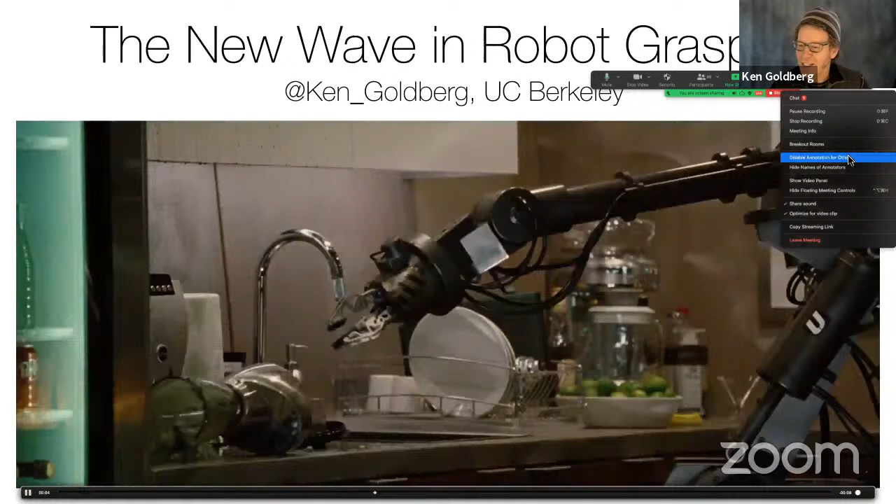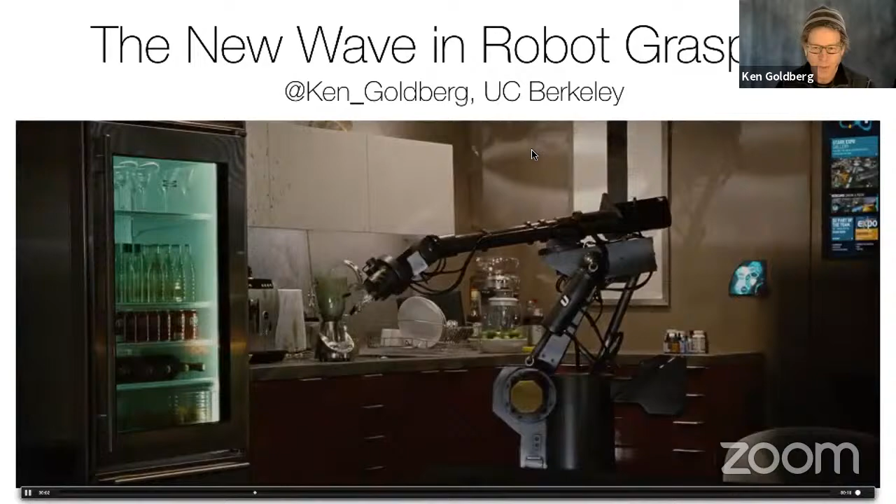Ken, all yours. Thank you so much, Animesh. I really appreciate that. It's such a pleasure. I'm glad that you pointed out my major achievement, which is being your advisor, a major accomplishment, I should say. Let's see. Can you see the screen? Is the video moving? Uh-oh. Now I'm worried that something went wrong. No, I think everything. You can see it? Yes, everything works. Okay, great. It's great. All right. Thank you, guys. Thank you for being here.

So what I want to cover today is what I call the new wave in robot grasping. And I always like to start with this video clip from Iron Man, and Animesh and other students have said over the years that this was a big inspiration for them to get them interested in robotics. And I love this scene in particular because that's kind of exactly where we are right now. Robots are still incredibly clumsy.

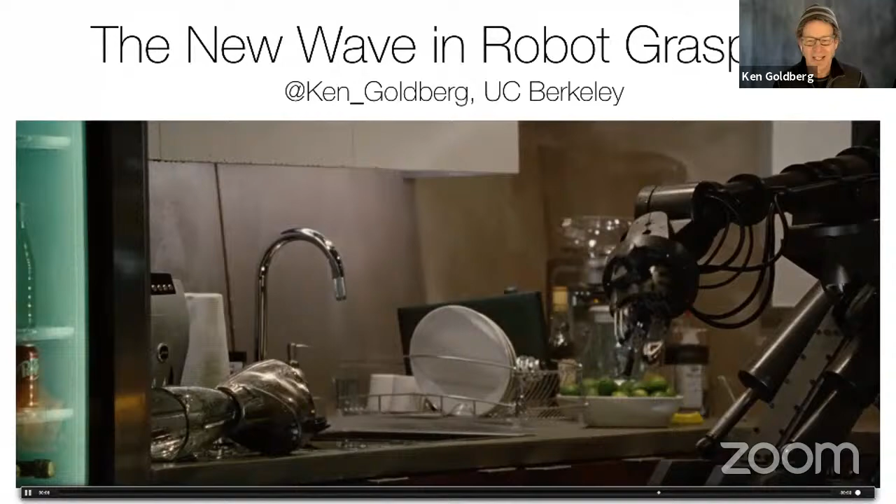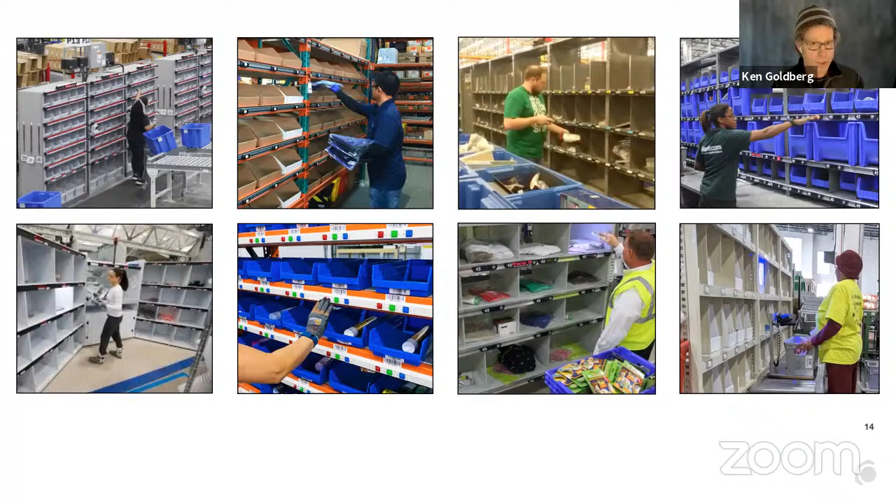Now, here's the challenge: what's behind the scenes when you order things, as most of you know, is that the orders have to be put together from these warehouses, and this is essentially a manual job. And this is what it looks like in an Amazon warehouse. And the other issue that you're seeing here is the proximity. This year, because of COVID-19, people didn't want to work in these kind of environments. They were too close, so they had to space the human workers out. And so there was a real limited supply of workers and a massive increase in demand.

So the grand challenge, as Rod Brooks has put it very nicely, is that if robots could grasp arbitrary objects, anything you put in front of them, like you see here, this is what you see in a warehouse, if we could do this, it would have significant impact in factories, homes, and warehouses.

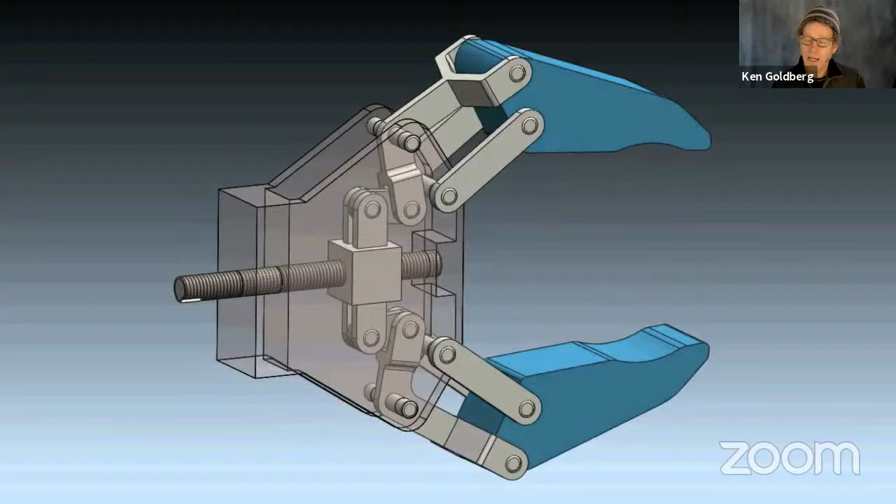Now, let me address the issue of hardware for a moment. And I know that there's really interesting and exciting work going on in robot grasping with hand design, but I want to argue in favor of very simple hands. This is the classic parallel jaw gripper. It's the workhorse of robot end effectors, and it can actually do almost anything.

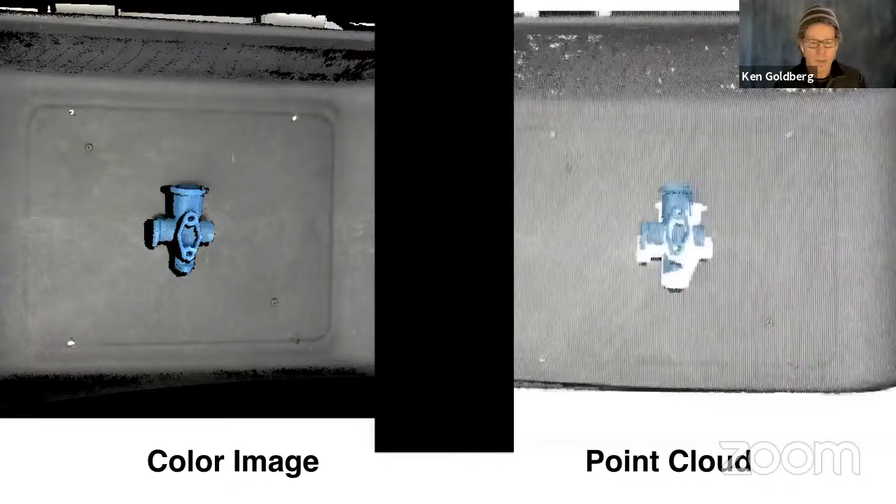Now, another thing I want to talk about is sensing. So a big change in the last decade is in depth sensing. And as you know, LiDAR has had an enormous effect on work in self-driving vehicles. It's also being used in this problem of warehouse grasping. And I just want to point out that it is an important advance, but it's not a silver bullet.

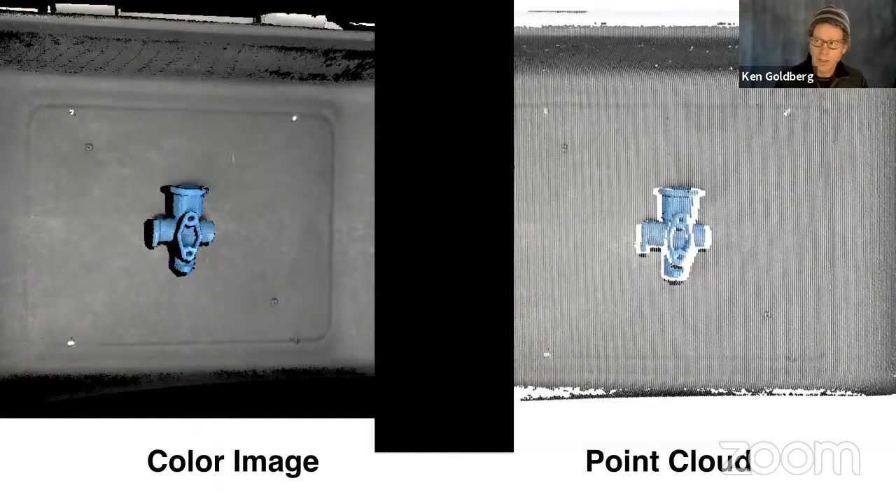So if you look at the image on the right, I just want to show you that the point clouds you get out of a typical depth sensor are not perfect. There are gaps and holes, and this is due to the light not reflecting in the way that it might be expected. And this is exaggerated when there are areas of high curvature or transparencies or specularities in metallic objects. So that's a big problem and something we have to overcome.

And I would even say it's non-stationary, because as you're pushing the object, it encounters different aspects of the surface friction. This is a very, very minute change. Just a grain of sand under there will cause a dramatic difference in the final orientation of the object. Now, I want to say that this is a hard problem. We can predict the motion of an asteroid 1 million miles away far better than we can predict the motion of pushing an object across the table.

In fact, I would even go so far as to say this is an irreducible problem. Knowing how the object is going to react is not something that with better information we can resolve. It's aleatory uncertainty. It is irreducible. Okay, so with all that, this is the challenge. We want robots to come in and clean up after a dinner party, but let me give you a sense of what it's like to be a robot.

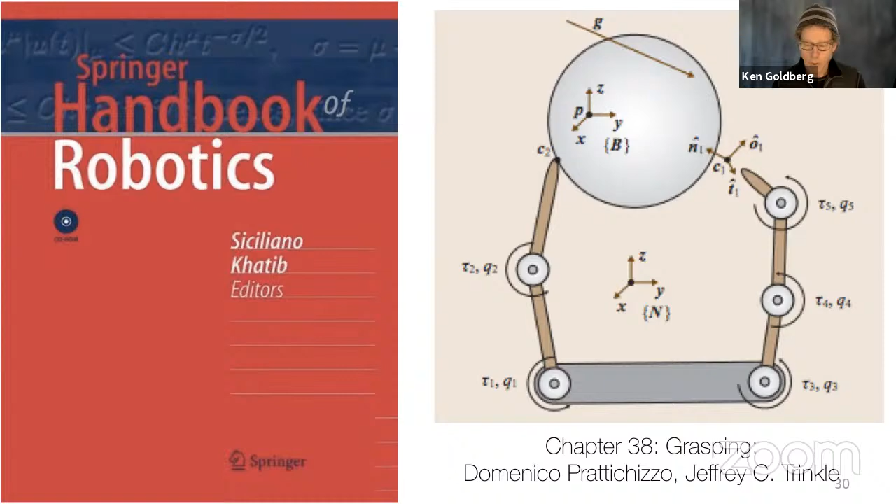Now, if you go into the Handbook of Robotics, the recent edition, there's a chapter on robot grasping. It's a great chapter. It covers this very, very nicely. It's about 40 pages. And if you get to the very end of it, you'll find a sentence: when a robot identifies an object to grasp, its knowledge of the object's pose and geometry are not perfect. Now, this is only mentioned at the very end of the 40-page chapter.

I consider this one of the greatest understatements of all time. I mean, this is such a huge matter, but it's totally not considered until the very end. And this is this uncertainty that I'm talking about. And the first wave essentially ignores it. It says, we know everything. We know the exact precise shape of the object. We know where all the contacts are. And that's what allows us to develop this beautiful mathematical machinery that can determine where things are. Okay, but that doesn't quite work.

Well, we started developing a model for this to capture uncertainty, and this was the beginning of Jeff Mahler's PhD thesis. He's contemporary with Animesh, and Animesh was involved in some of this work as well. And we call it the dexterity network, for a reason I'll explain, or DexNet. And the idea here is that there is uncertainty. So we're going to treat it in a statistical way. We're going to consider all these variables as random variables. And now we have a graphical model where we can talk about where the sources of uncertainty are.

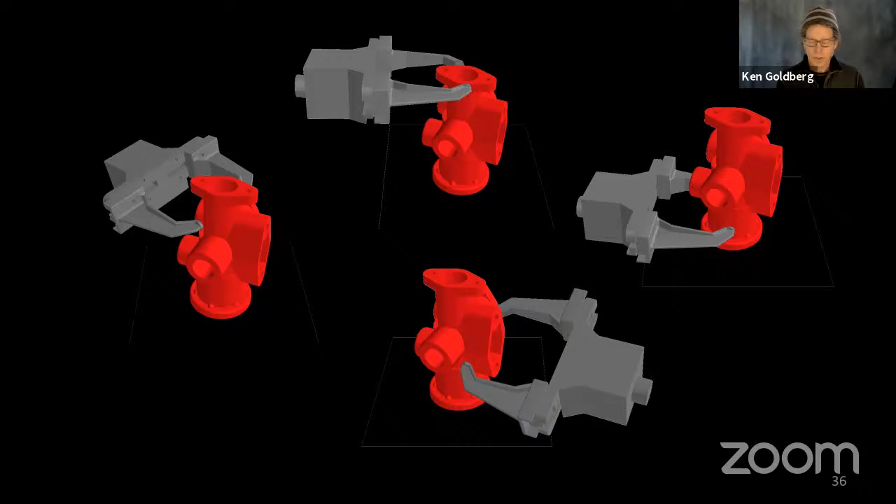So what I want to do, though, is I want to find ones that are robust. In other words, they are tolerant of these uncertainties. And what I mean by that is shown here. I have a nominal grasp, and then what I'm doing is I want to start to look at small perturbations on that grasp and sample from these distributions.

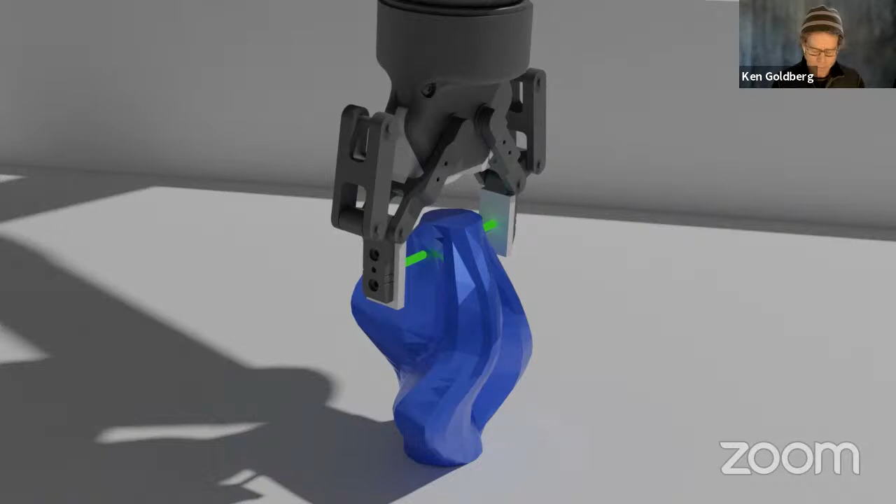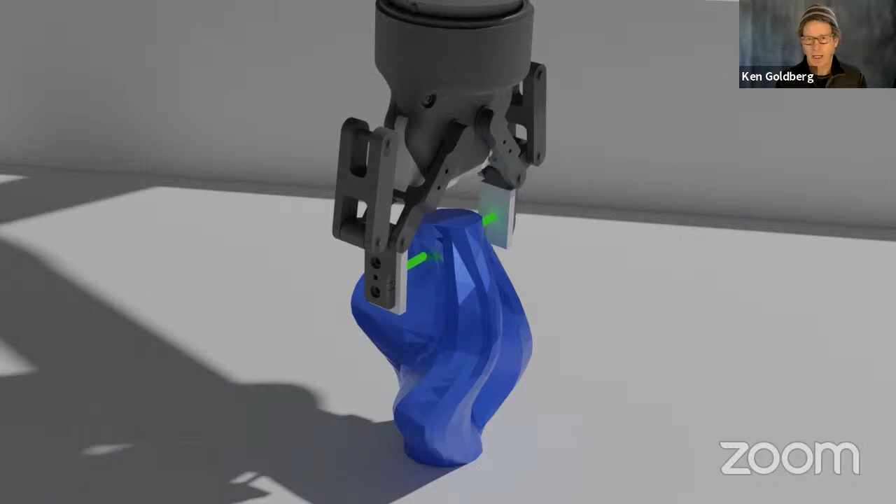So I'm varying the pose of the object, the pose of the gripper, the center of mass, and all of these variables. And for each one, I'm checking, will it succeed, using the classic wrench mechanics. So I'm not throwing that away. I'm using it, but using it in a stochastic model. And so then we can do a number of samples, and then we basically are doing a version of Monte Carlo integration here to estimate the probability of success for a particular nominal grasp.

So the outcome might be something like this, where on the left, we have a very low probability of success, and on the right, very high probability of success. And hopefully that's intuitive to you as well, because with the one on the left, you can imagine a very small error will cause that part to move away, whereas the one on the right is almost self-aligning. It tends to sort of close in and scoop up the part, even if there's small uncertainty. So that's why it has a high probability of success.

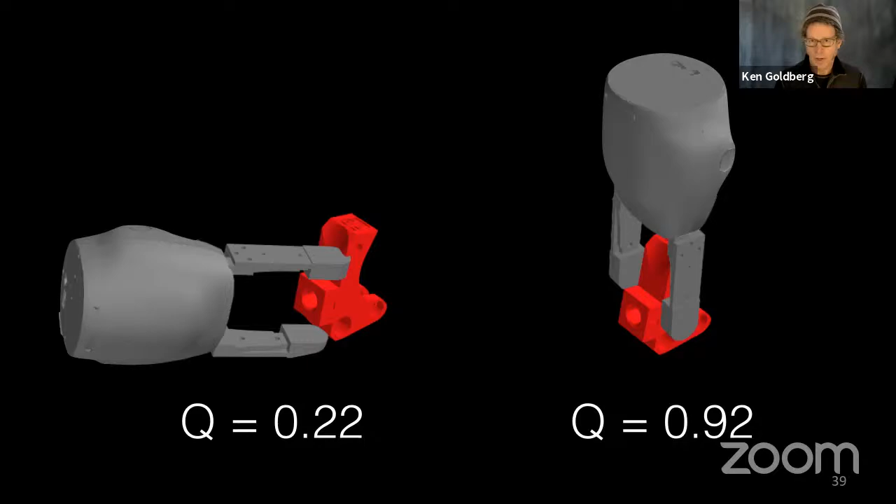Now, we implemented this in what we called DexNet 1.0, and the idea was we took images using depth cameras that I mentioned earlier, and we then estimated the state of the pose of the object, that's X, and then we apply the Monte Carlo analysis to basically find the grasp that has the highest probability of success. And let me show you it working.

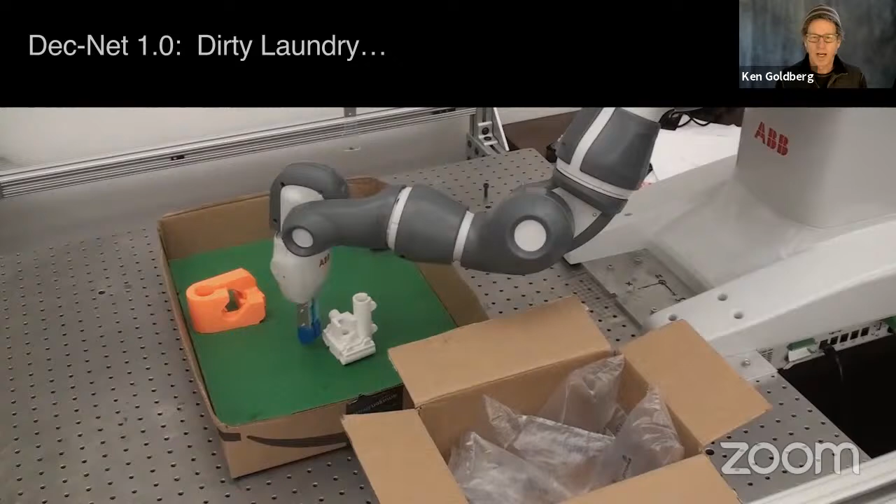So not so much. All right, what happened? Well, the problem here is that it computed a beautiful, robust grasp, but the state was wrong. So it thinks the object was actually in a different configuration, and it executes a perfectly robust grasp, but for the wrong state. So this does not always work. And the issue is perception uncertainty.

And so now we have another issue here we really want to model. Remember, we started with the 3D camera image, and then we use that to estimate state. But we have to actually learn a better way to do that, and we have to do that more systematically. So now I'm given an observation, Y, which is in this case a point cloud or depth map, and then I want to plan the grasp that will maximize the robustness or the probability of success. And this really leads us to the second wave, where uncertainty in perception comes in.

And this is where this distinction between Plato and Aristotle comes back, because remember, Aristotle was arguing in favor of a very different approach to making progress in the world, and it was to look down at all the plants and animals and rocks and minerals and build up models from data. So his point was collect data, and that is essentially the root of the contemporary wave in artificial intelligence, deep learning. It's data driven, and it's been extremely successful.

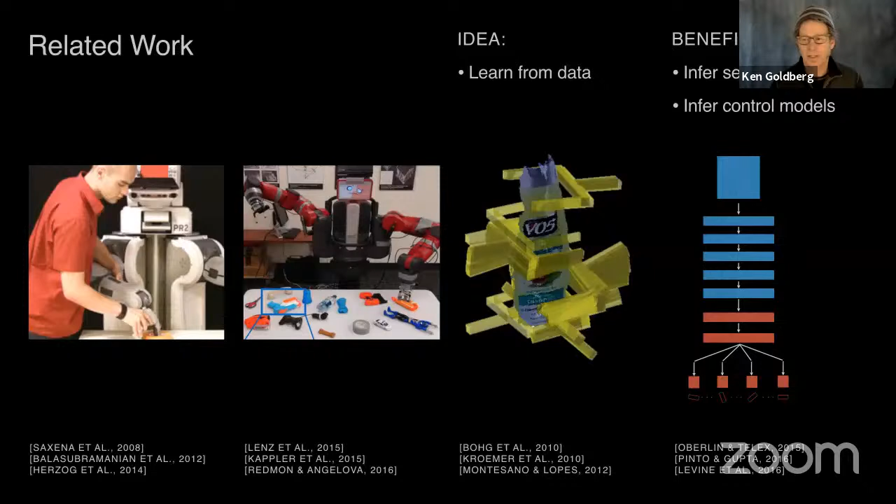And a number of researchers have been applying that to robot grasping, and it's accelerated over the last decade. One of the very natural sources is to look at real examples, to learn from experience in the real world. And so these can be either human labeled or self-supervised. In particular, you're probably familiar with the arm farm at Google that set up 14 robots to work around the clock to basically acquire data on grasping.

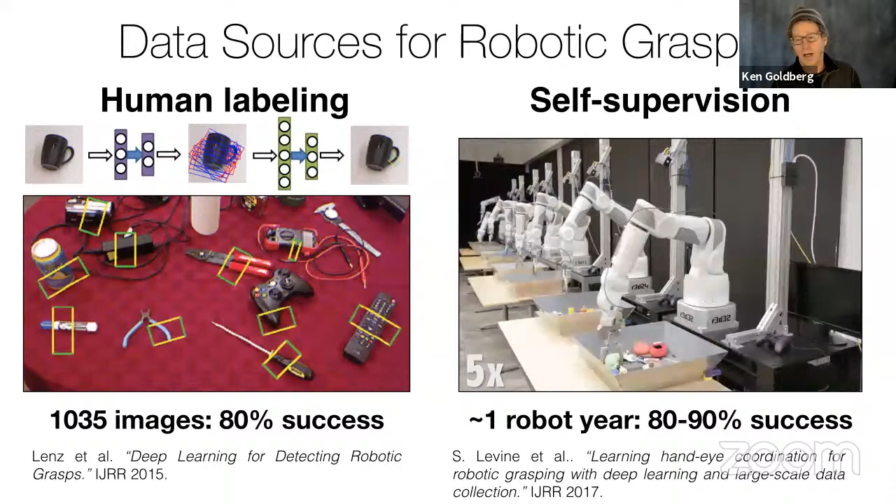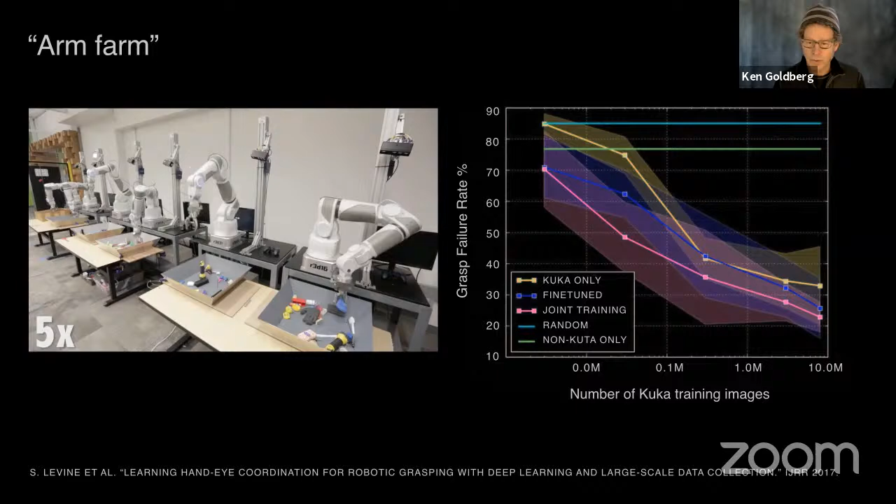And one thing I want to point out, though, is that if you look at the published results there, as it learns, this is a learning curve, it's able to reduce the failure rate, as is shown on the right. But if you look really closely, this is a log scale, and it says that after about 10 million examples, the system is at about 20% failure rate.

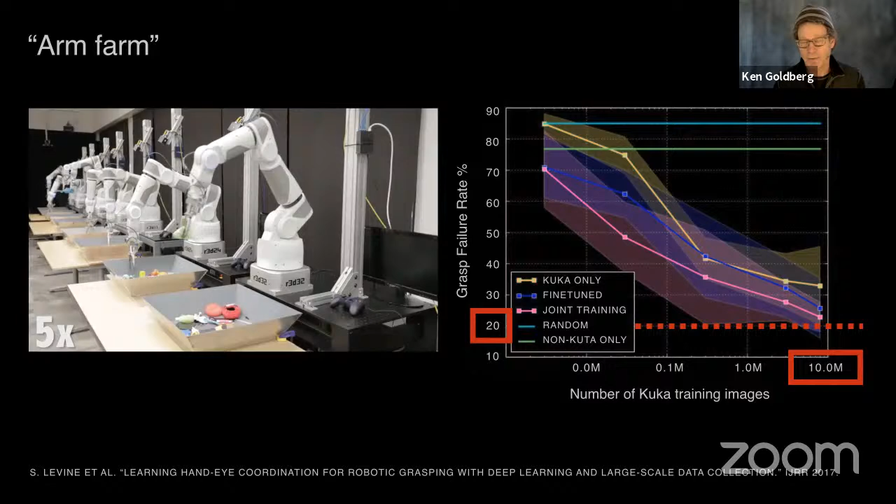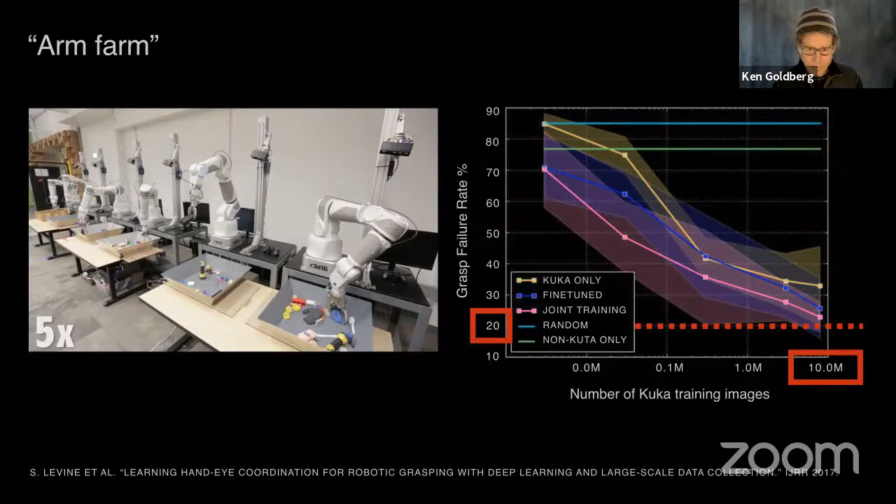Now, if you try and extrapolate out from that, it looks like, probably at 100, that's, by the way, a year's worth of round-the-clock data collection. So if you want to get down to 90%, looks like you're going to need another 10 years of data collection. And if you really want to drive it down to 95, you might be looking at 100 years. So my point is that this idea is that the system, by collecting data, you need a great amount of data.

Fei-Fei Li and her colleagues developed this ImageNet, this data set of millions and millions of images, but they were hand labeled, drawing bounding boxes around objects and then labeling what those objects were. So my hypothesis is, could we do something similar with robotics? Instead of ImageNet, we'll call it DexNet. And the idea is to come up with lots of labeled examples. And in this case, we're labeling them not with a name of an object like a necktie, but we're labeling the objects with robust grasps that we're pre-computing.

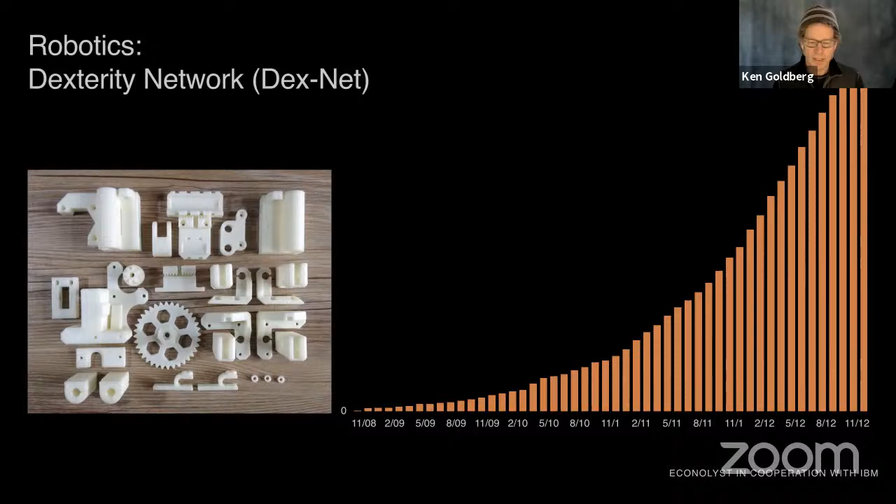And so this is the analogy: can we generate a very large data set that would get us to a critical mass where we could start to see the system generalizing to new objects? In the same way that ImageNet reached a critical mass, and once you had that, you could learn a very large neural model, a convolutional neural net, that would then be able to generalize to new examples. And so we set out to do this, and the good news is that there's a lot of 3D models out there.

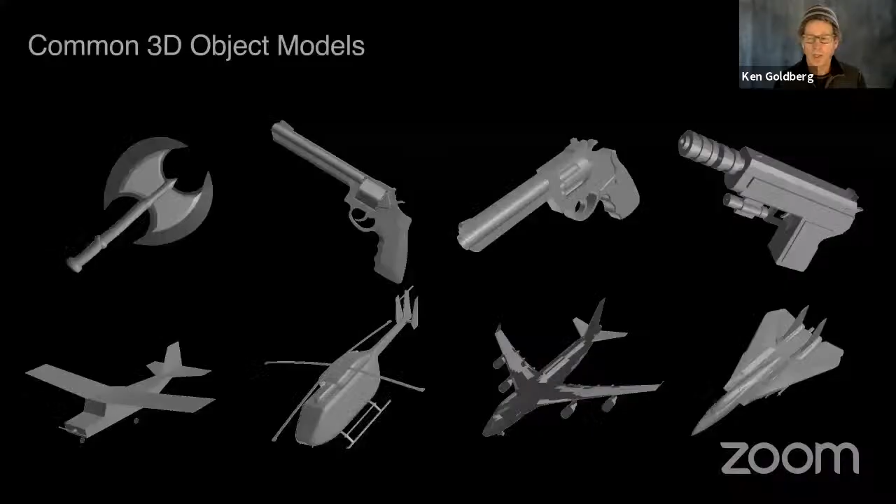One is that a lot of people are publishing 3D models for gaming. So when you look out there, you'll find lots and lots of weapons and aircraft. We have plenty of those, but those are not very commonly found in warehouses. So we had to really curate a data set of three-dimensional objects that were more natural in, let's say, warehouse and home environments. So we found objects like these. We cleaned them up. We made them watertight so that the surface normal properties are correct. We made them into regular solids, etc., and scaled them. This was a fairly long process.

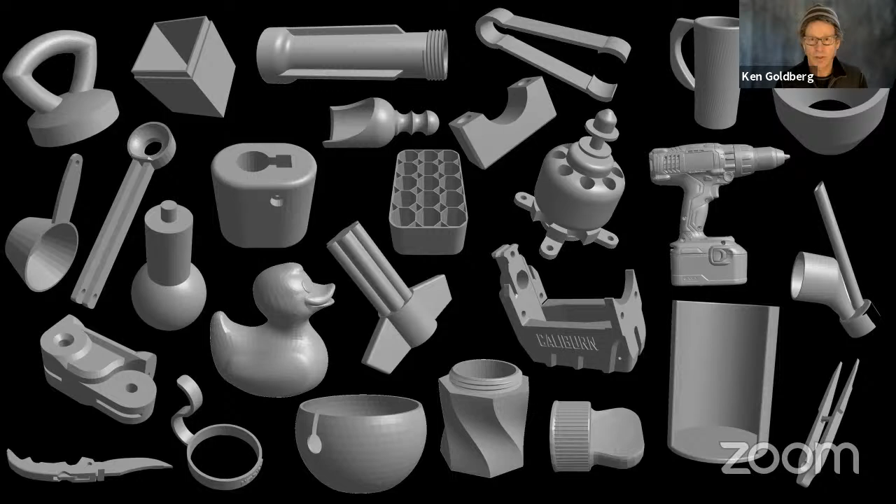We also augmented the data with blister packs. This is very common in warehousing and retail, where you have objects that are attached to a piece of cardboard. So it's very easy to add that little planar surface onto the object and then use that as a new object.

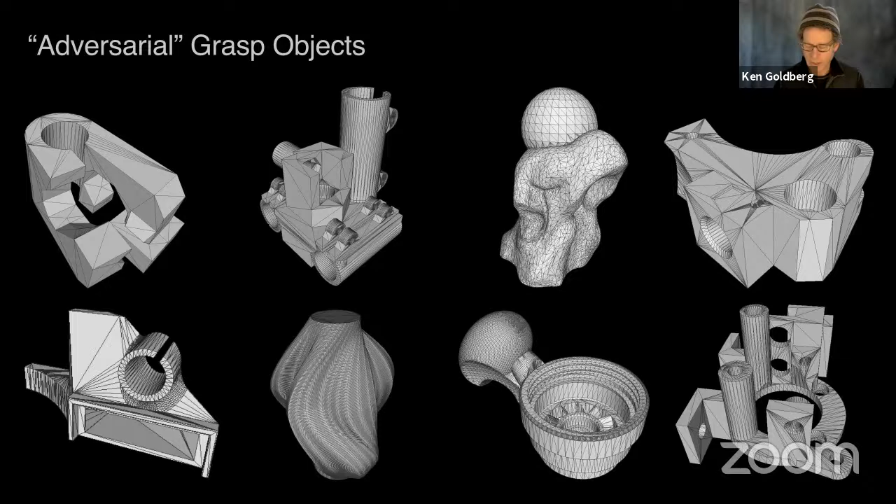And then we also looked at what we call adversarial objects. This is somewhat inspired by the work going on in adversarial computer vision, where they come up with examples that are very difficult. Here we wanted to find objects that were difficult to grasp, not obvious. So it took some time to find these kinds of objects, but we've been collecting them. And then we put them together into a big network, because we want to understand relationships between them.

So this leads us to the new wave, and I want to just do a quick shout out to a book that came out this year. It's called How to Train Your Robot, and it's available for free online on my webpage. My daughter Blooma is the first author. She's a very good negotiator. She wanted to make sure she was first author on this book. And it really tells the story, as I mentioned, about kids and gets them interested in robots.

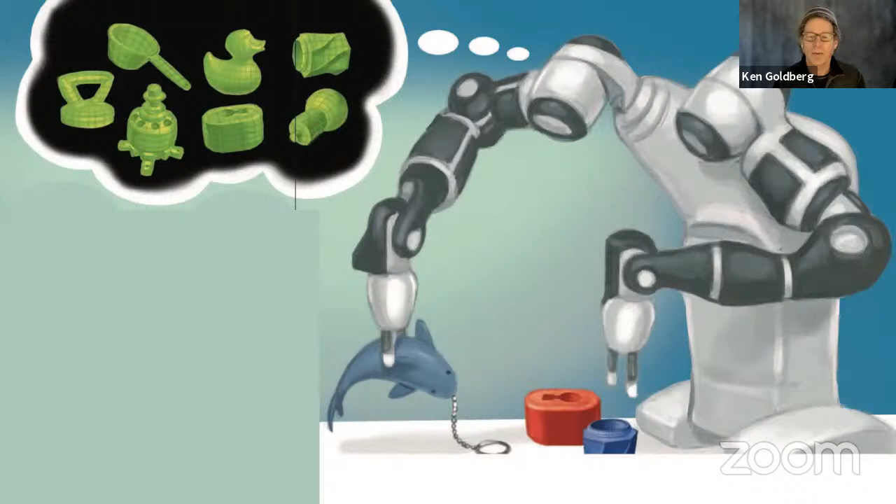There's a scene in there. It basically tells the story about Dex-Net learning how to grasp objects. And in particular, trying to explain it to kids, we came up with the analogy that it's like the robot was dreaming about how to grasp objects. And that's how it learned. In other words, not doing it physically, but dreaming about it.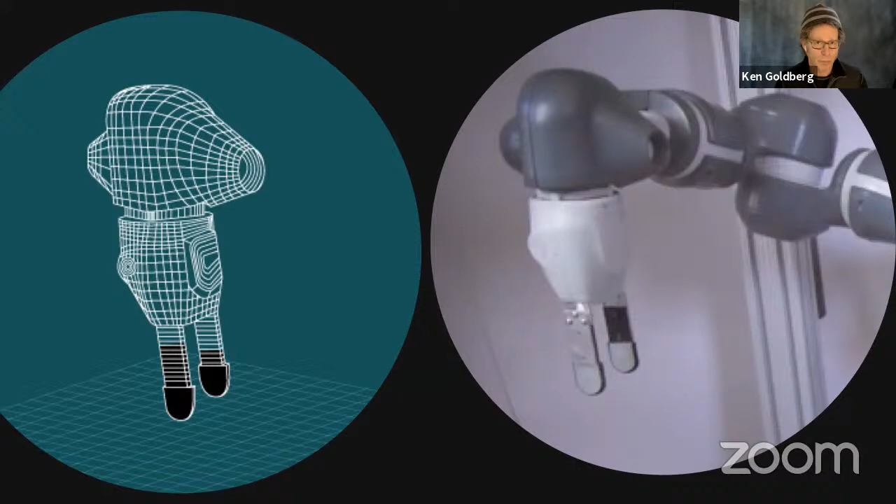And so what I want to say is that the important distinction here is that we're now performing the grasps in simulation and then learning from many of the simulated examples rather than doing them with real robots. Now, the simulation is also a daunting amount of computation.

So as I mentioned, for each object, we might have 1,000 facets. That's 1,000,000 possible grasps. And then we might consider 1,000 perturbations for each grasp. So we're talking about 1 billion grasp evaluations per object. And if we have, say, 10,000 objects, then we're getting into a fairly large number of computations. We have to do 10 trillion grasp evaluations.

So that can be actually parallelized very nicely. So we did that. We put it on AWS and spread them out. And then you could actually do this kind of computation overnight. Now, we also wanted to speed it up a little bit. Now, just a quick detour here.

We found a fun idea, which was to use multi-arm bandits to bootstrap this. And the idea is to make use of similarity between objects and between grasps. And there's this idea of correlated bandits. And the key idea is first you have to identify when you have two similar objects. So we built a network to do that,

building on this, at that time, new idea of multi-view deep convolutional neural nets, that you could just take a lot of synthetic views of an object and then train a network to identify the object from different views and cluster those different views together as a similar object. And that worked very well. So that gave us a similarity measure that we can use in a kernel to control the learning process.

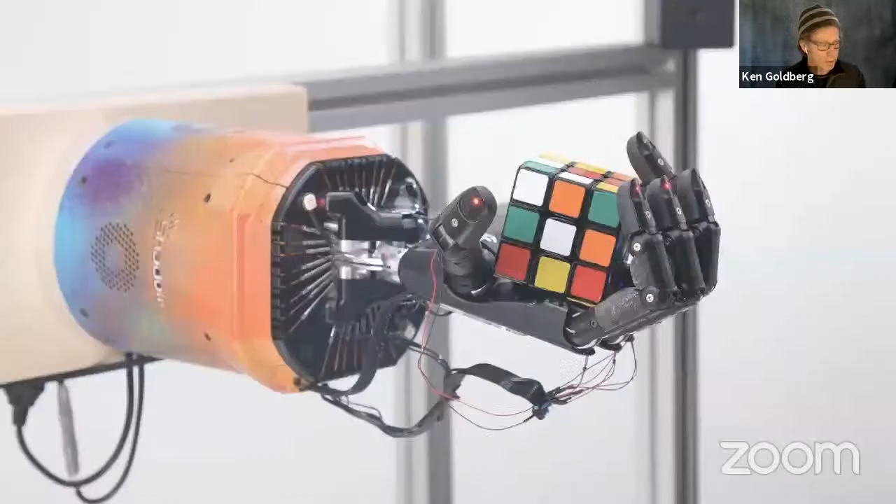All right, now you may be familiar with the advance of OpenAI. They developed the robot, the Shadow Hand, performing a Rubik's Cube and being able to manipulate it. As you know, it's a very extensive process of using simulation like we have been doing. And they also adopted a technique that we've been doing, which they call domain randomization. This is exactly what we talked about earlier.

They want to randomize the system and give it lots of variation. And this is essentially a key trick to crossing what you might call the reality gap from sim to real. So the idea is you have to inject noise. You have to make the system robust in simulation if it has any hope of working in reality. So we do this in terms of both the control, but also in the sensing.

So what we're doing is we're generating 3D depth maps, and we're injecting noise into those that is consistent with the noise properties of the cameras that we use. So again, not just random noise. I really believe in structured domain randomization, where you are putting in noise that actually has the properties of your real system, your real sensors and your real controllers.

And what we get out of that is a data set. And this is the set where you have combinations of an input image, Y, a grasp configuration, U, and then R, the estimate of the robustness of that grasp.

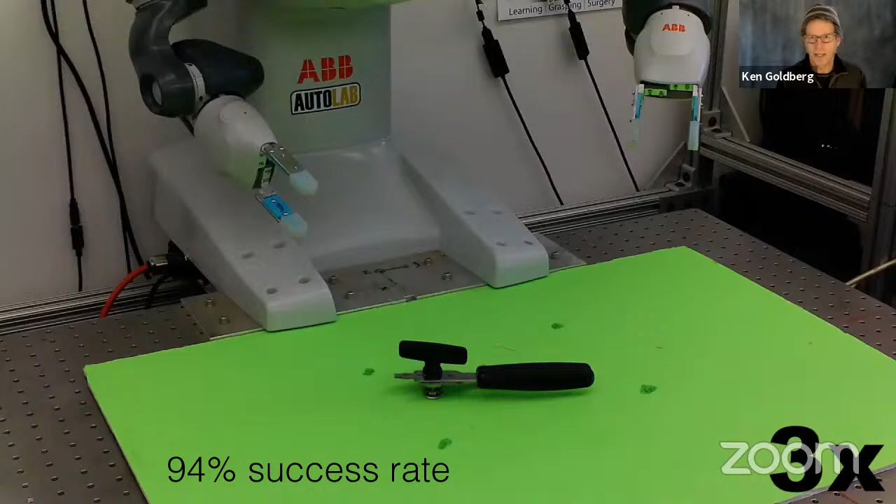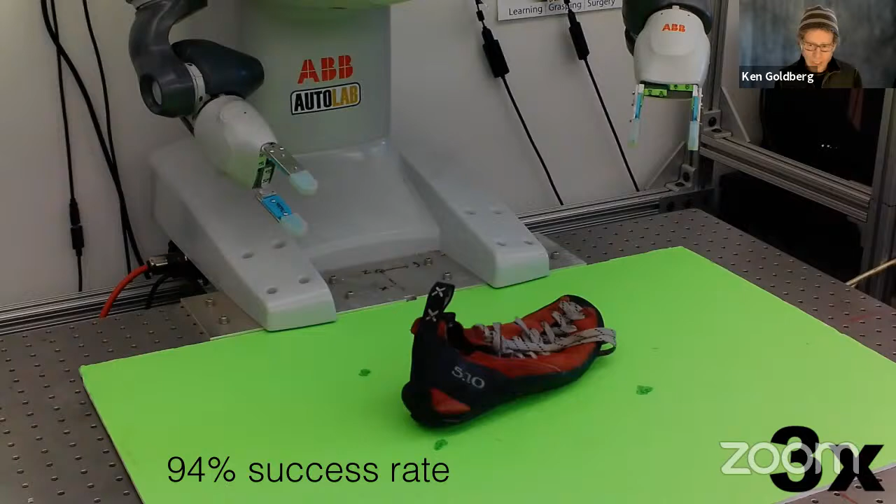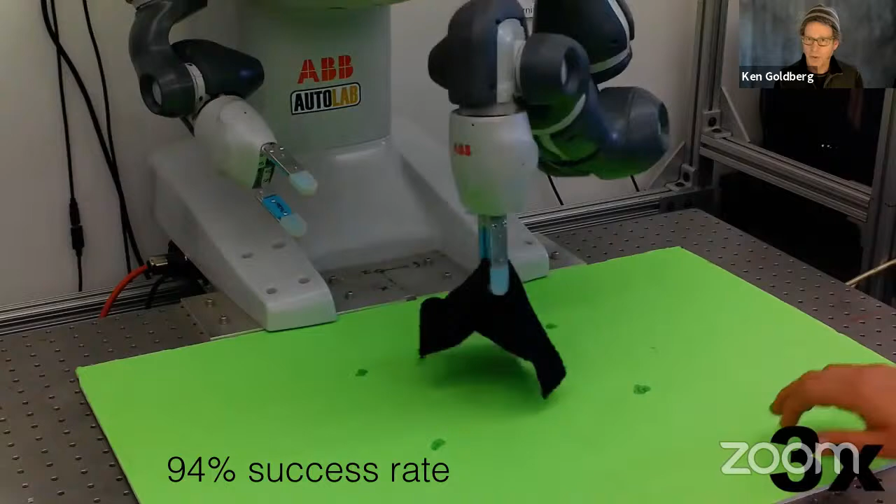So it was very surprising. And I have to say this, when Jeff called me into the lab and said, let's look at how well this is doing, I was surprised. These are objects that it was not trained on, and it actually performs surprisingly well. And by the way, all the objects it was trained on were rigid. So it's starting to pick up things that were non-rigid. So it was generalizing very well. And that got us very excited.

So the next thing Jeff did was he extended it to bin picking, which is a notoriously difficult problem where you don't have just one object in isolation, but you have a heap of objects in a bin. And what he did was the same thing, was to train it on synthetic bins. Again, like dreaming, not dreaming about picking up one object, but dreaming about bins and picking up objects out of bins. And you could train it very analogously.

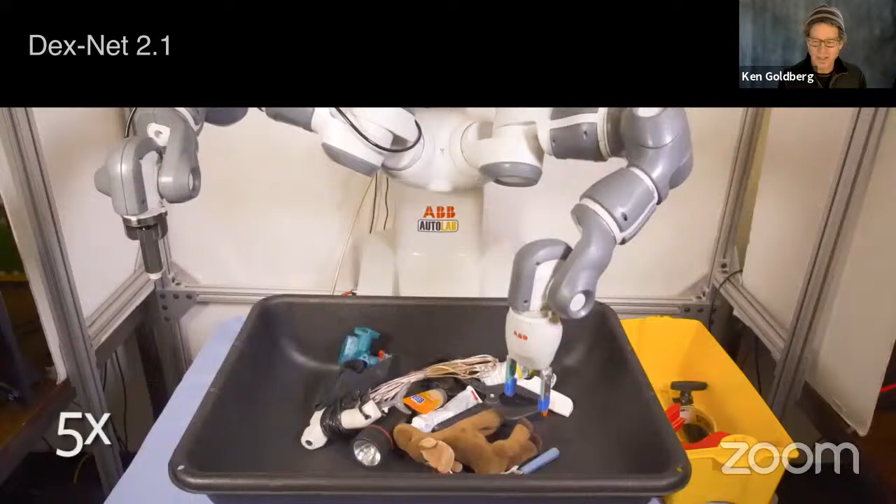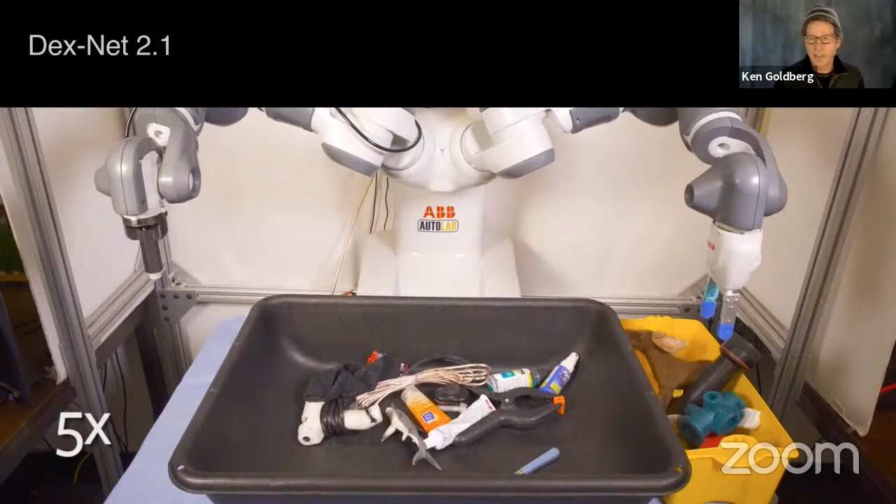Now it's actually working in bins, and we call this Dex-Net 2.1, and it's able to pick up things. Again, none of these have been trained on. They're all novel objects, and some of them are deformable. So we released this. We got some really nice coverage in the press, and companies started to approach us about incorporating it. And one of the things that they pointed out was that they use a different kind of gripper,

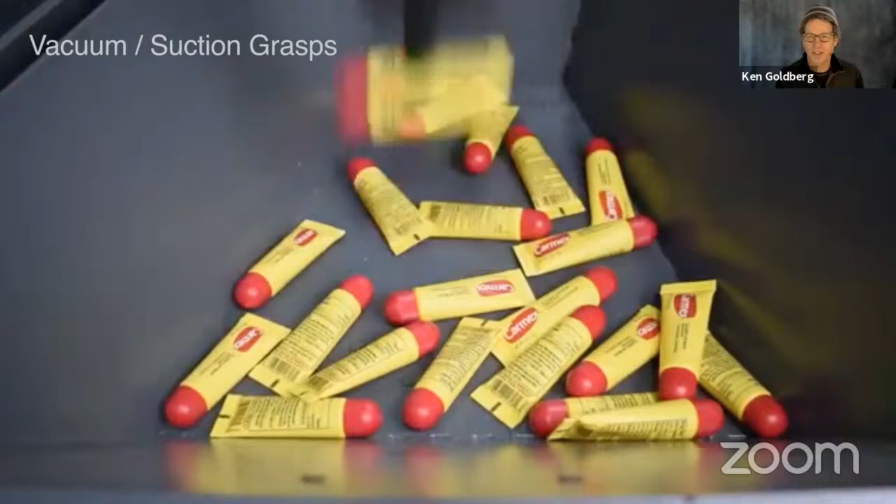the suction cup. And now, remember, I was making a big point about simplicity. We were always using the parallel jaw gripper, which has two contacts. Well, the suction cup only has one. So it turns out that's what we call unicontact grasping, and we just hadn't really considered that. So we started looking into it. And we were surprised that there was very little literature on unicontact grasping and suction cups.

In other words, to really model the physics, analogous to the beautiful literature that we had found for contacting with parallel jaw or multi-fingered hands. And it may be out there. We still haven't found it. So if some of you are aware of it, please share it with us. But we started to develop our own.

So the first step was to try to model the physics of the vacuum cup itself and this contact, the seal of the vacuum, which had to do with the local surface geometry. And generally it's not planar, so you have to look at how much it varies from planar, and then look at the conformation of the suction cup.

And then you also have to think about a new model of the wrench mechanics, because suction cups are different than finger joints, which are contact between two jaws, because here you have the ability to resist forces orthogonal to the suction, but actually very poor ability to resist torques that will peel the suction cup off.

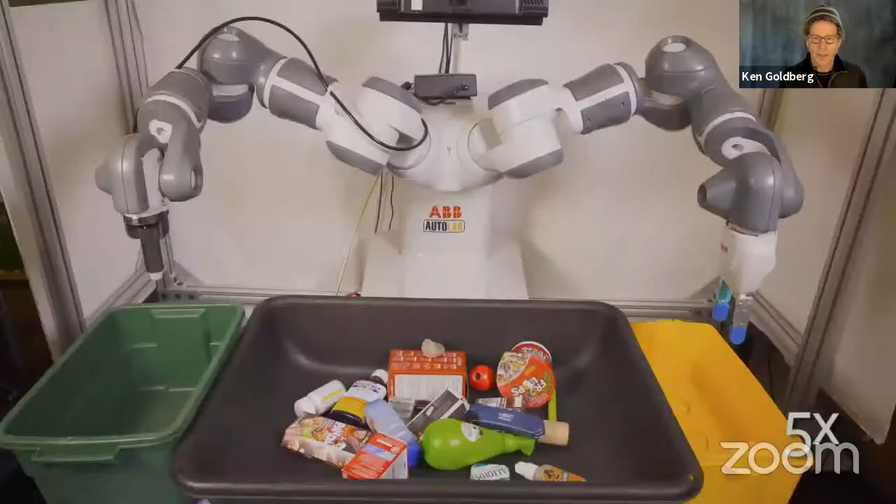And in a bin, again, we did this in the bin context, you can do that as well. And so now it's looking for points in a bin that have a high probability of success for a suction grasp. And then we put these together. So we call this ambidextrous, where the robot has two different kinds of grippers. It's got a suction cup on one hand and the parallel jaw gripper on the other. And so the suction cup can pick up a lot of objects, as you see here, but now we want to actually have them both working.

So we call this composite policies that use both of these two modalities. And the key there is to put them into a common reward function, because you have to normalize these estimates. And that took a little bit of time, but basically you can see on the left, this is characterizing the grasp axes and their probability of success. And on the right, the suction probabilities and how probable they are. And then we can essentially at any given time make a decision which of the two modalities has the higher probability and execute that one.

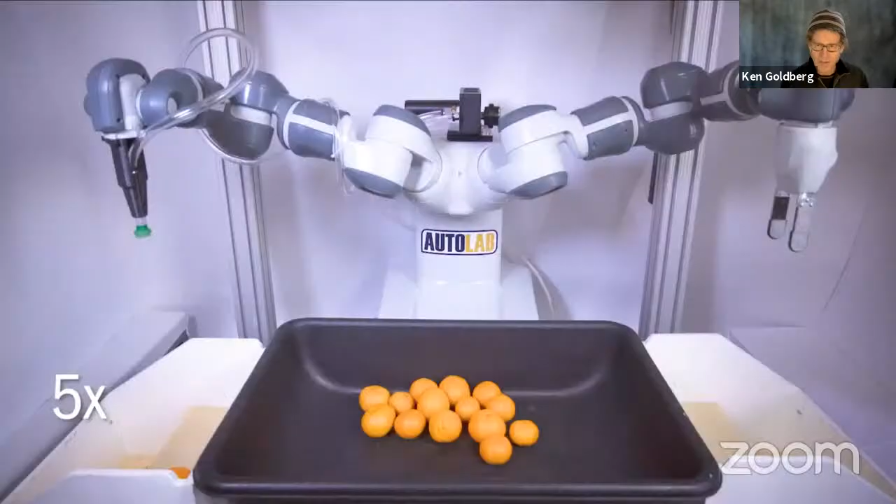So now the suction is trying to pick up things and the gripper is trying to pick up what it thinks it can. And it doesn't always work. So the suction can't see that this object is porous, but then it knows to send over the parallel jaw gripper. So this has been very, very fun to watch this evolve. We have a paper on this in Science Robotics, looking at this ambidextrous model.

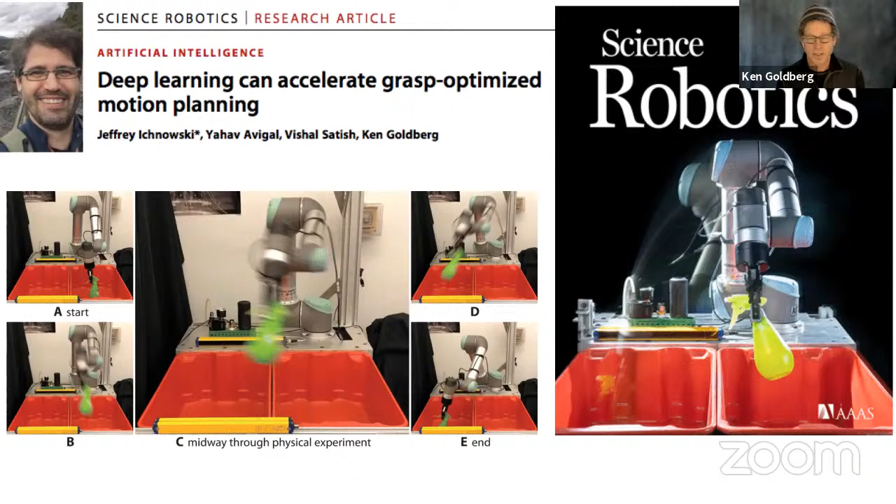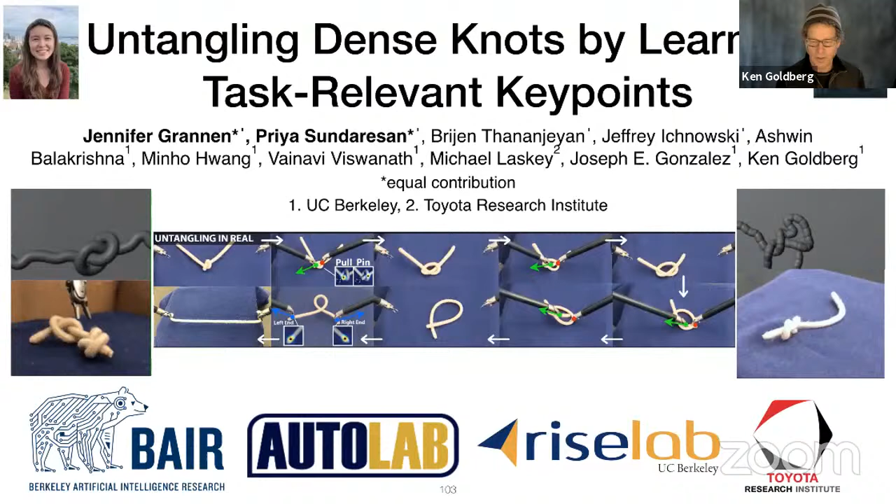Another project that I'm excited about is actually being led by two undergrads, Jennifer and Priya, who are tackling the problem of untangling cables. And this is a real problem in many homes, certainly, but also in a lot of industrial environments and repair shops and in boating, etc. And it turns out there's some really nice theory out there, knot theory, essentially, how to model knots, but it's essentially graphical. So the trick is, how do we then get to the graph?

And they've been looking at these deep learning techniques to identify pin and pull points, to learn pin and pull points by example, and again in simulation, and then be able to untangle structures like this. And we're looking at dense knots, that is, knots that are fairly tightly knotted. And these are some successful runs of this bilateral manipulator. It's actually a surgical arm, picking up and basically loosening and untying these kinds of knots.

And we're also looking at dynamic cables. So we were inspired by one of my favorite movies, Raiders of the Lost Ark. And so we have a paper that will be at ICRA in May. We're calling it Robots of the Lost Ark. And here the idea is to manipulate fixed endpoint cables. So you imagine that you're, let's say, vacuuming, and the power cord gets stuck, and you have to sort of flip it to get around a chair or something. And people do this all the time, but can we get a robot to do it?

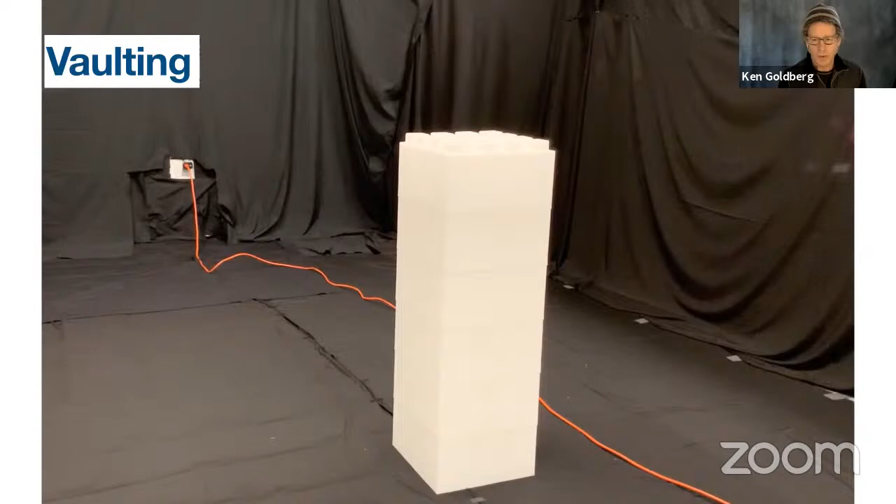So we've been studying that, again, using a combination of techniques. But the idea is we want to be able to perform a task like vaulting over an obstacle. We also look at what we call knocking, which is we place an object on an obstacle and we want it to be knocked over, or weaving. And this is to arrange the cable between multiple obstacles.

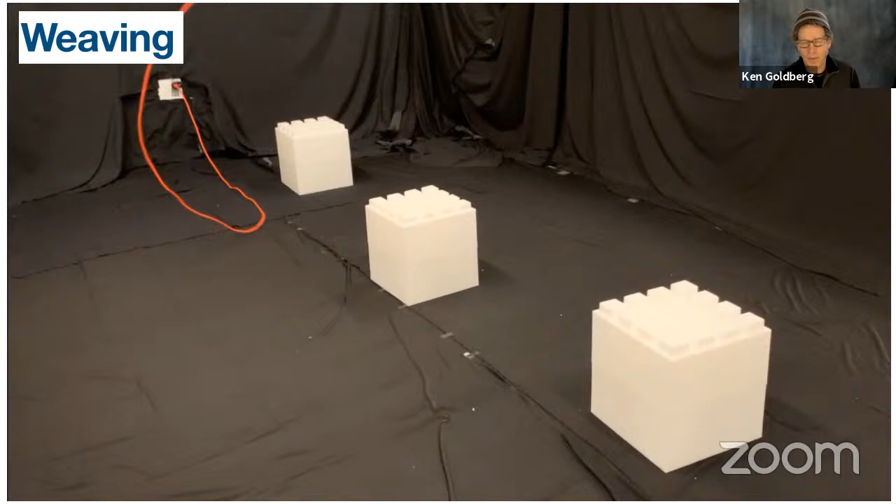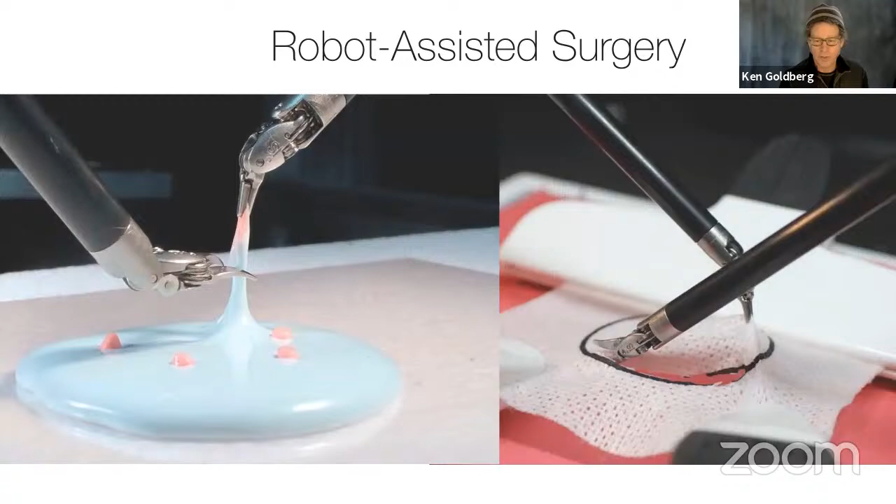So we're also working on robot-assisted surgery, and Animesh did a lot of this work when he was in the lab, and it's ongoing. We're looking at things like debridement, especially when we look at environments that may be deformable, as mentioned earlier. And we have a Da Vinci robot arm in the lab that we use regularly for experiments.

And another last project I'll mention is what we call the Alpha Garden. And there's some information on that website. We're studying the question of, can a robot learn to tend a polyculture garden? Now, monoculture, which is the way most agriculture is done, is where you keep all the plants nicely separated, and that's hard enough. But when you start to put different species together in close proximity, which is how polyculture gardening works, which has a number of advantages in terms of robustness to disease, allows you to use less fertilizers and pesticides, and also reduces the amount of irrigation required.

That's a huge challenge. So I actually don't know if the robot's ever gonna be able to do this. We've been working on it for over a year now, but I'd be happy to talk more about it. It's a work in progress.